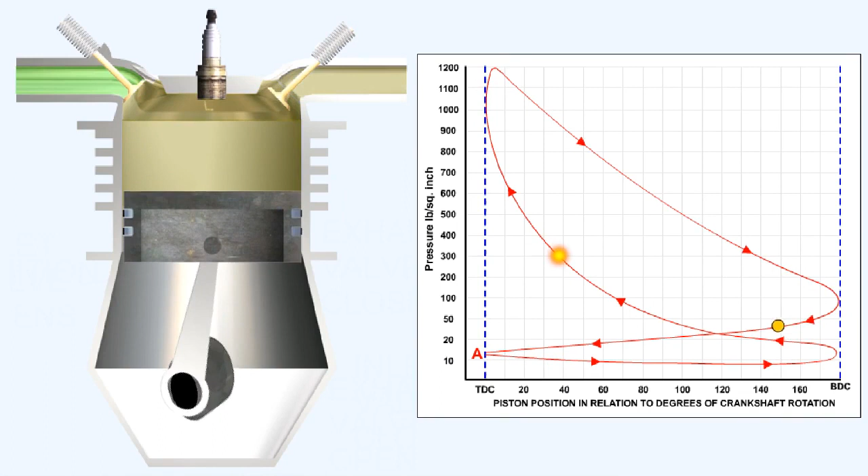These circumstances ensure that there are no fluctuations of pressure in the engine as there are in the piston engine, where peak pressures greater than 1,000 pounds per square inch have to be accommodated.

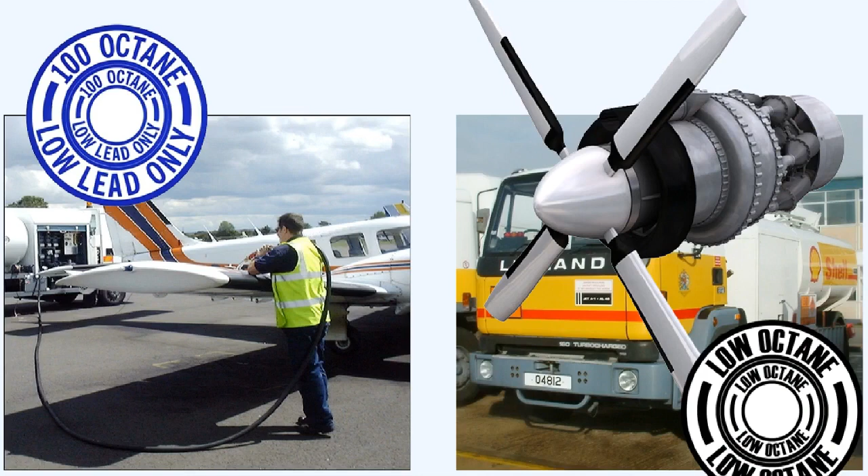These high internal pressures necessitate utilizing extremely strong and heavy construction in the piston engine, and also, if detonation is to be avoided, the use of high-octane fuels. In contrast, in the gas turbine engine, the use of low-octane fuels and relatively light construction methods are the rule, rather than the exception.

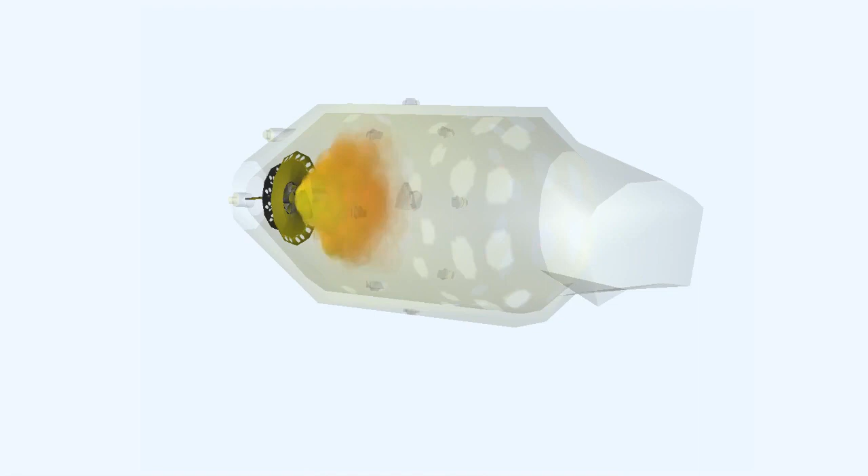The turbojet is a heat engine. The higher the temperature attained in combustion, the greater the expansion of the gases, and hence the greater efficiency of the engine. There is, however, a limit to the amount of heat that can be released into the turbine from combustion.

This limit is imposed by the materials from which we manufacture the nozzle guide vanes and the turbine blades.

The Germans' inability to produce materials which could withstand the heat of the gas stream was the main problem with the early German gas turbine engines. Because of the poor materials used in the turbine assemblies, the engines would only run for between 10 to 20 hours before the turbine blades suffered meltdown and engine disintegration commenced, usually in a quite catastrophic fashion.

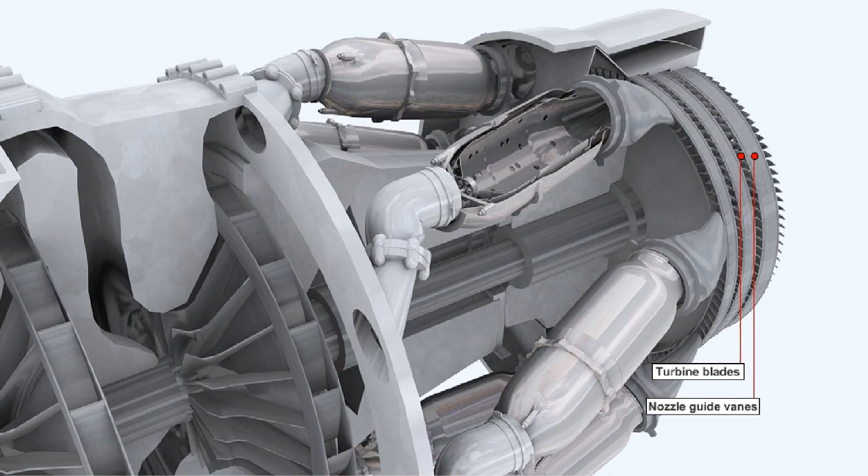The use of modern materials and extremely efficient cooling methods in the nozzle guide vanes and the turbine blades has enabled the use of much higher gas temperatures in the latest engines. This has resulted in the more modern engines having a higher thermal efficiency than their predecessors.

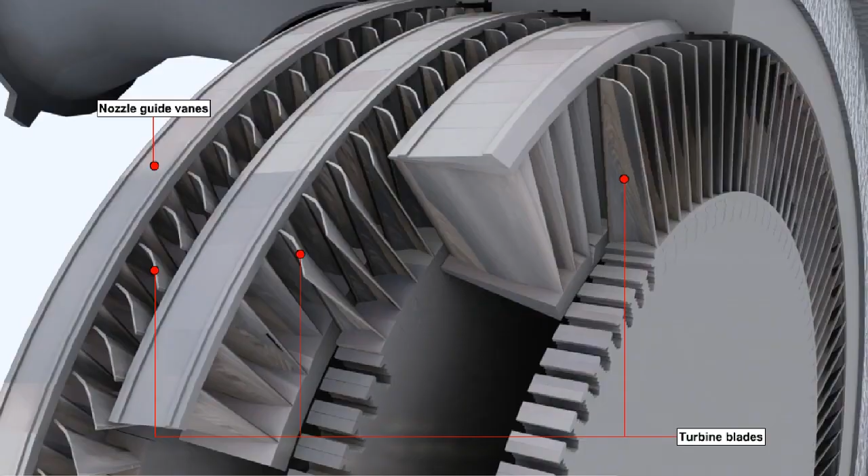Gases behave differently from the other two commonly studied states of matter, solids and liquids, so we have different methods for treating gases and understanding how they behave under certain conditions. Gases, unlike solids and liquids, have neither fixed volume nor shape. They are moulded entirely by the container in which they are held.

There are three variables by which we can measure gases: volume, pressure, and temperature.

We'll discuss two of the so-called gas laws which are most pertinent to the operation of the gas turbine engine: Boyle's law and Charles' law.

Robert Boyle was born in 1627 in Ireland. He made important contributions to physics and chemistry, but is best known for the law which was named after him, concerning an ideal gas.

Boyle's law states that, in a gas which is held at a constant temperature, the volume of that gas is inversely proportional to its pressure, or pressure times the volume equals a constant. This holds true where P is the absolute pressure of the gas, and V is the volume occupied when the pressure is P.

This is a reproduction of an experiment carried out by Boyle. He had a calibrated syringe filled with air and deduced its volume. While taking care to retain the temperature of the air inside the syringe constant, he increased the pressure and decreased the volume inside it by placing weights on its plunger, taking readings as he did so.

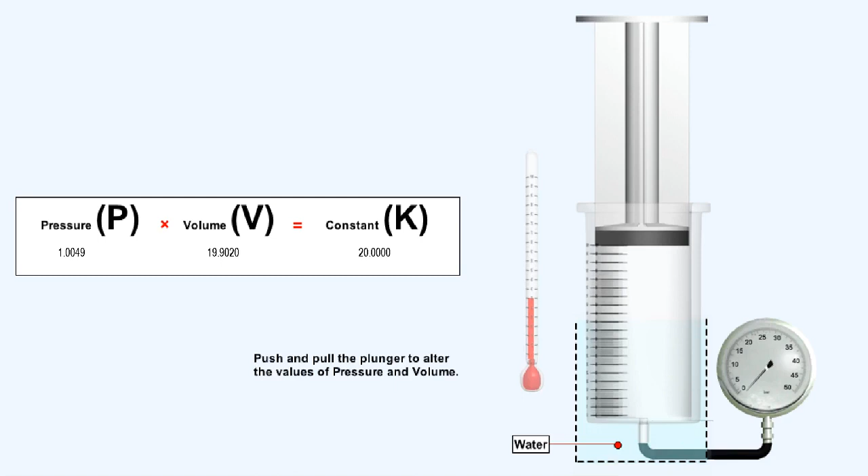Because of the interest in hot air balloons in the early 1800s in France, Jacques Charles and Joseph-Louis Gay-Lussac made detailed measurements on how the volume of a gas was affected by its temperature.

Just as Robert Boyle made efforts to keep all properties of the gas constant, except for the pressure and volume, so Jacques Charles took care to keep all properties of the gas constant, except for its temperature and volume.

Charles' law, or Gay-Lussac's law, states that if any gas is held at a constant pressure, its volume is directly proportional to the absolute temperature, or, if stated as a formula, the volume divided by the temperature is a constant.

Just as we did to demonstrate Boyle's law, we'll replicate an experiment similar to one carried out by Jacques Charles. If we partially fill a calibrated syringe with air and place it in a container of water, then by increasing or decreasing the temperature of the water, and thus the air inside the syringe, while taking readings of volume and temperature, and dividing volume by temperature in degrees Kelvin, we see that the answer is a constant.

Remember that, in theory, the pressure inside the syringe remains constant also. Try changing the temperature of the water for yourself, and notice that the results of volume divided by temperature remain a constant.

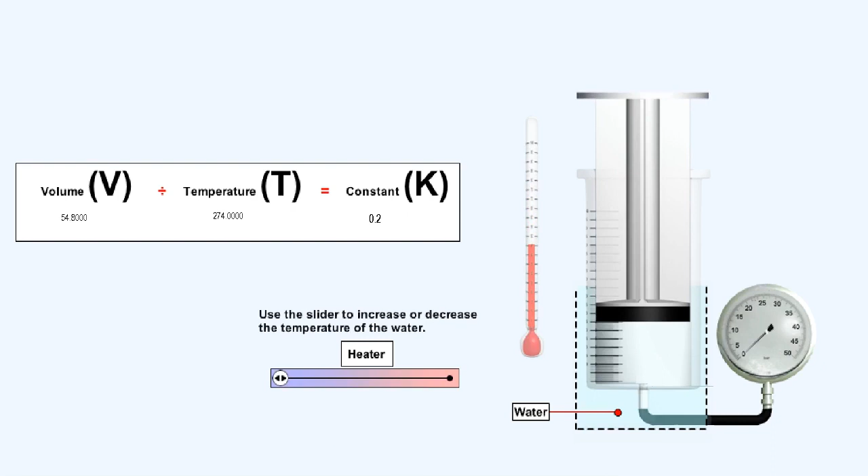Although both Boyle's law and Charles' law work in theory, we are unable, with existing technology, to make them work in practice. For instance, it's impossible as yet to increase the pressure of a gas without increasing its temperature, because of the adiabatic heating which inevitably occurs. Remember the example which is consistently quoted of how a bicycle pump always heats up when air is pumped into a tire.

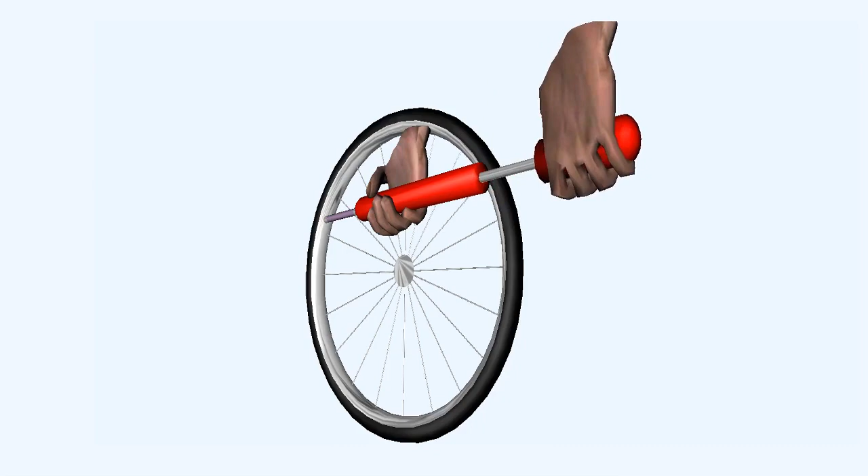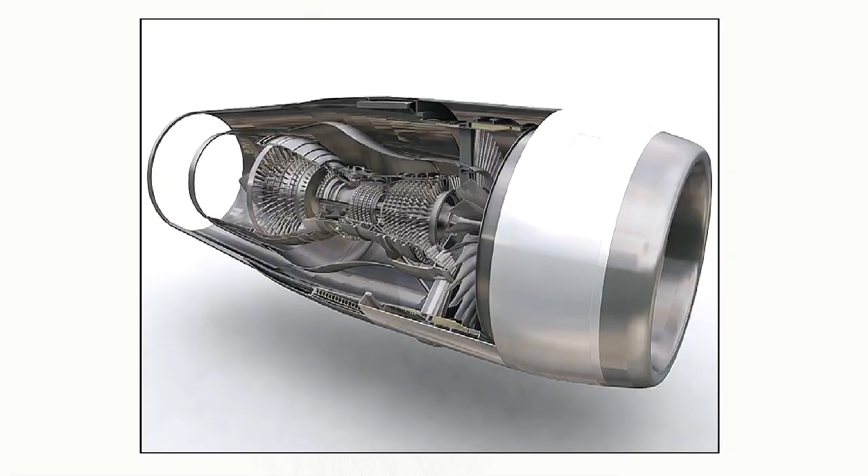By using Boyle's and Charles' law together, we get a practical method of determining what is happening to the gases inside the gas turbine engine, where temperature, pressure, and volume are all changing constantly. With the scientists' usual lack of imagination, they have named the integrated Boyle's and Charles' law the combined gas law. The combined gas law represents the relationship between volume, pressure, and temperature. This may be shown as P1 times V1 over T1 equals P2 times V2 over T2.

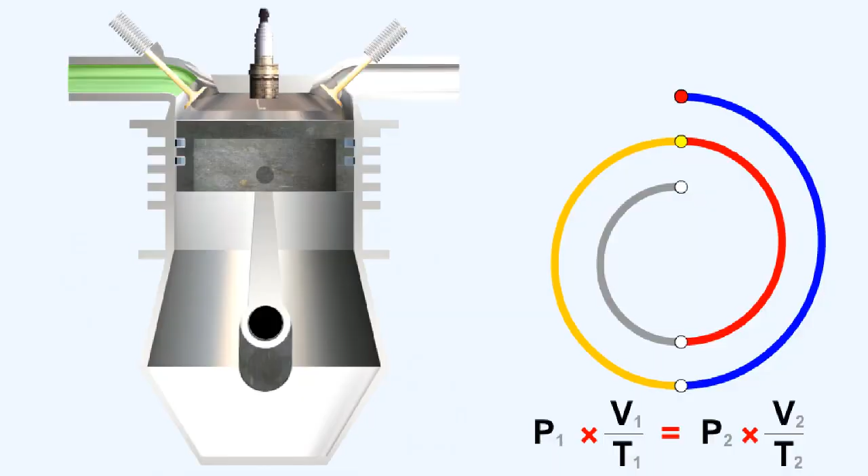The three main stages when these conditions change in the gas turbine engine are during compression, combustion, and expansion. During compression, work is done to increase the pressure and decrease the volume of the air. There is a corresponding rise in its temperature. Just as they do in the piston engine, higher compression ratios give higher thermal efficiency and lower specific fuel consumption.

Notice that the velocity of the air as it progresses through the compressor is actually reducing. This is required so that when it gets to the combustion chambers, its speed is not such that it will extinguish the flame.

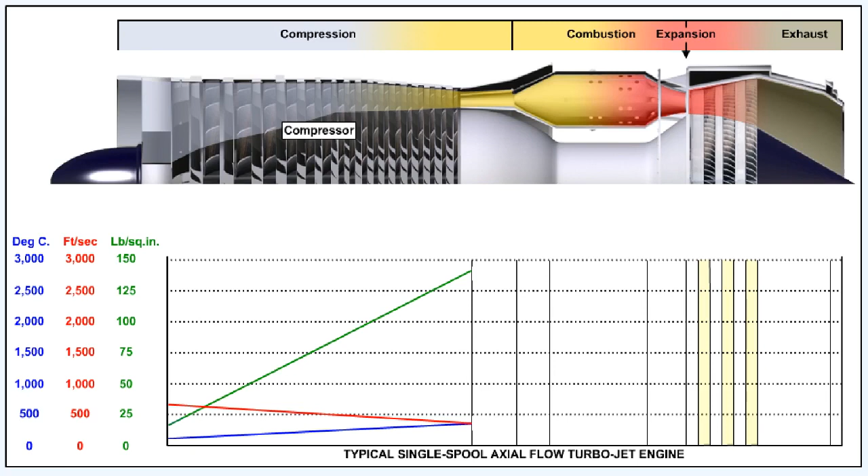During combustion, the addition of fuel to burn with the air increases the temperature, and there is a corresponding rise in its volume at an almost constant pressure.

The velocity of the gas flow continues to reduce through the combustion phase, until the end of the combustion chamber, which, due to its convergent shape, initiates an increase in its value. The reason for this will soon become apparent.

During expansion, when some of the energy in the gas stream is being converted to mechanical energy by the turbine, there is a decrease in both the pressure and the temperature of the gas with a corresponding increase in its volume.

The changes in velocity over the expansion phase are a little more complicated than in the previous phases. The expansion phase is when the kinetic, pressure, and heat energy in the gas stream are being converted into mechanical energy by the turbine to drive the compressor.

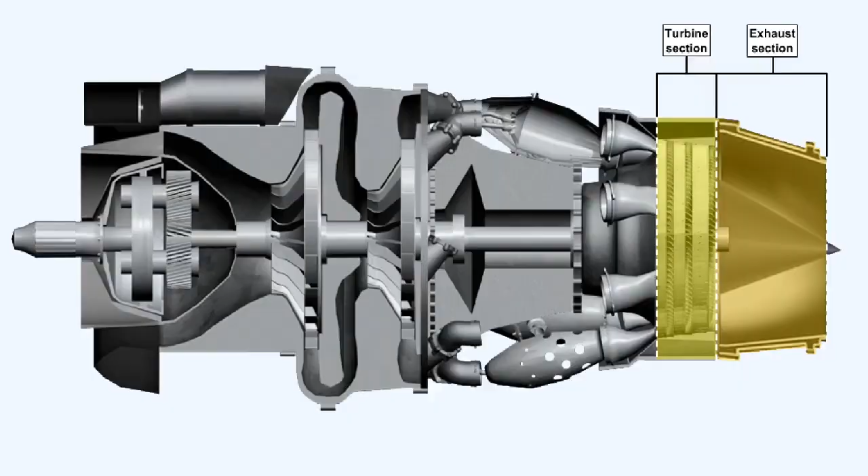The turbine is most efficient at converting the kinetic energy in the gas stream into mechanical energy, and in order to do this, the nozzle guide vanes which precede each turbine rotor stage are shaped to form convergent ducts.

At the nozzle guide vane stage, the pressure energy, and to a lesser extent the heat energy, are reduced by the convergent ducts, and converted into kinetic energy, which, as you can see, shows a dramatic rise.

The turbine rotor following each nozzle guide vane stage reduces this kinetic energy by converting it, and some of the remaining pressure and heat energy, into mechanical energy.

Succeeding nozzle guide vane stages will continue to convert the pressure and heat energy in the gas stream into kinetic energy, and the turbine rotor stages which follow them will convert that kinetic energy into mechanical energy.

The gas stream is then directed into the exhaust nozzle, where the velocity decreases at the expense of a small rise in pressure. This decrease in velocity assists in maintaining the losses in the jet pipe due to turbulence at a minimal level.

Finally, as the gas passes through the sharply convergent propelling nozzle, the duct shape causes a distinct increase of velocity, and the pressure of the stream drops to that of ambient in response to that increase.